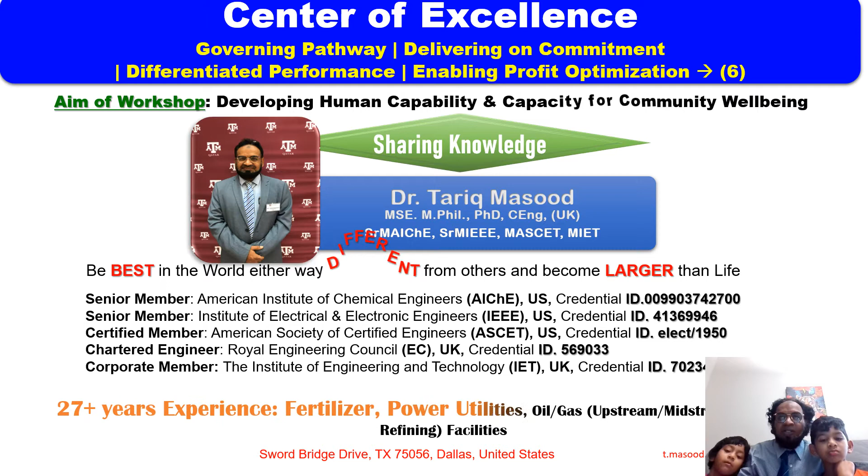Today I'm going to discuss my lecture number 6 on Center of Excellence, governing a pathway, delivering on commitment, differentiated performance, enabling profit optimization process, lecture number 6. Earlier we concluded the 4th section of HAZOP study. Today we are going to discuss HAZOP study session number 5.

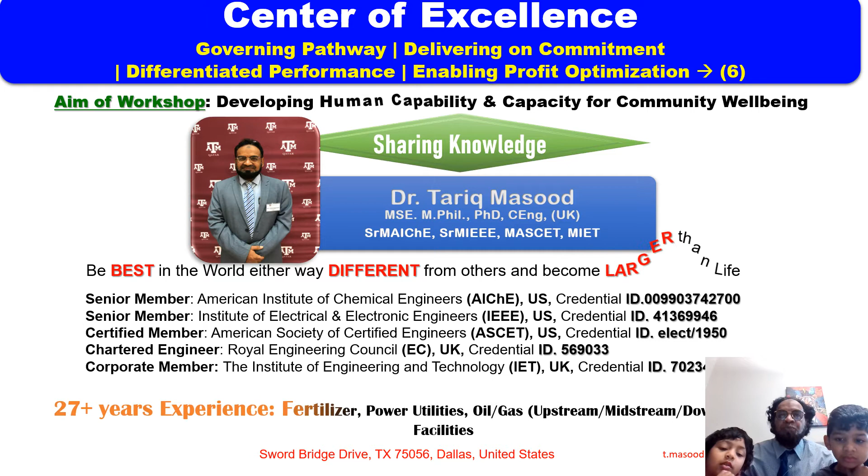Before my lecture I used to read a Quranic verse. Qala Rabbi Shrahli Sadri wa Yassarli Amri Wahlul Uqdatum min Lisani Yafqahu Qawli, Allahumma Rabbi Zidni Ilma. O my Lord, open my chest and ease my tasks for me, and loose a knot from my tongue that they may understand my saying. Allahumma Rabbi Zidni Ilma, O Allah, advance me in my knowledge and true understanding.

Center of Excellence, lecture number 6, HAZOP study guideline, section number 5.

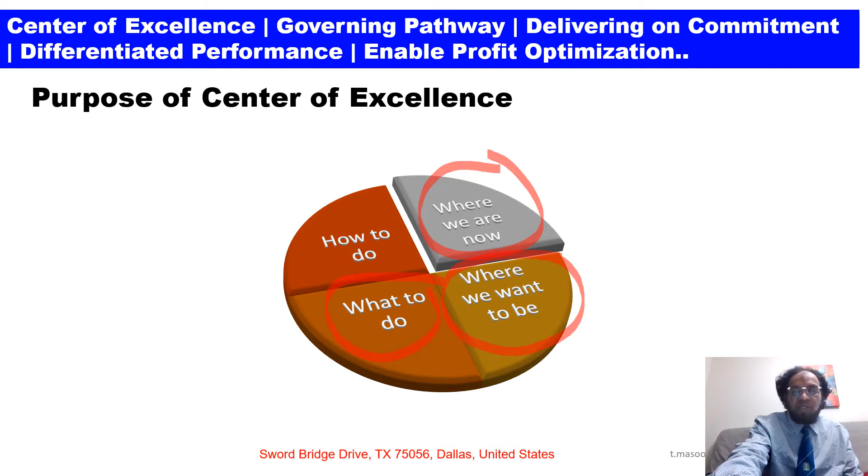Purpose of Center of Excellence: where we are now, where we want to be, what to do, and how to do. These are our 4 concepts in order to deliver the Center of Excellence. These are a narrative, sequential narrative to deliver as far as the Center of Excellence is concerned.

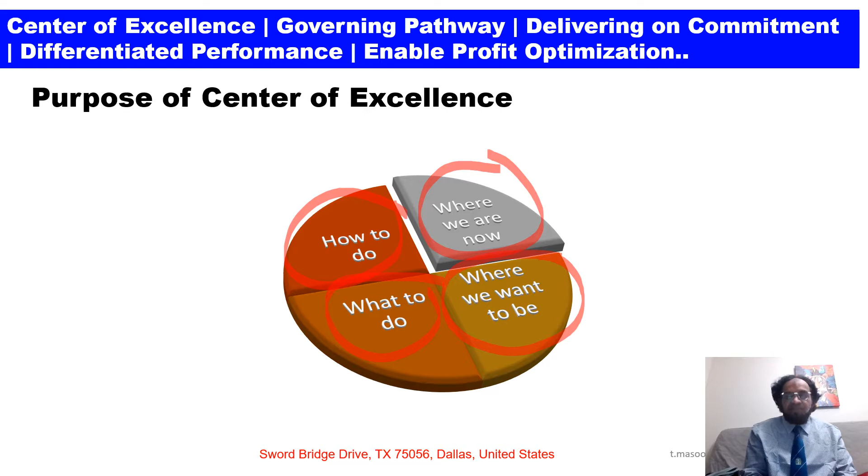Center of Excellence, governing pathway, delivering on commitment, differentiated performance, enabling profit optimization. This is a Center of Excellence framework. We have already discussed the HAZOP, brief summary about QRA, quantitative risk assessments, risk assessment management system, and SIL assessment.

Today we will give a brief about 5 segments, then we will discuss in detail at a later stage. First we will give a brief about the leadership best practices. Engineering and production best practices are leadership methods and simple in concept.

We will discuss in my lectures on leadership best practices, matrix organizations, about balanced leadership, layered leadership that differentiates focus but keeps line of sight. Production asset business widens view to see the whole picture, business planning tool and budget process. We will discuss this in leadership best practices or engineering and production leadership.

Lecture number 2 on Center of Excellence, at a later stage, segment number 2: competency assurance. In competency assurance, we will discuss what is competency, key elements of staff competency enhancement, how to maintain personal and operational integrity, and we will also discuss ensuring a personal competency development and sustainment plan.

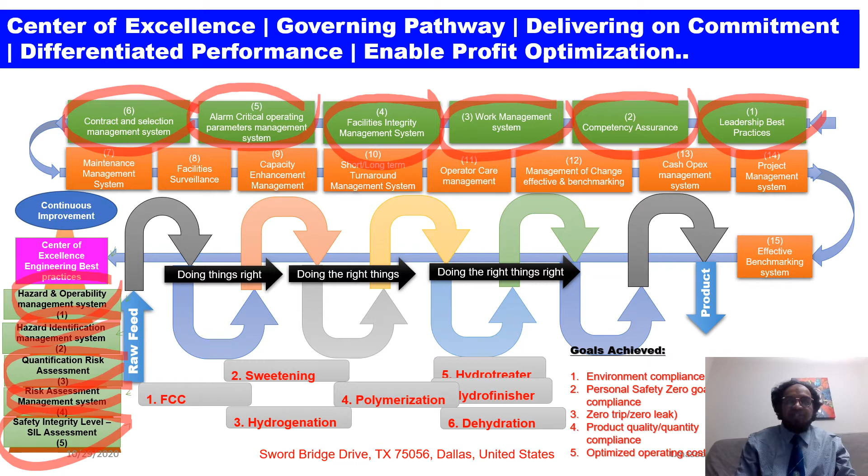Okay, Center of Excellence for continuous improvement. We will start from bottom to top here.

First segment here: personal safety, contractor, co-workers, and community safety must be reliable. These are my leading factors. My semi-leading factors are environment compliance, process and asset safety - work safely or not at all. Number 3, my semi-lagging factors: there's always a time to do right things in the right way. And lastly, improvement - if it is worth doing, do it in a better way.

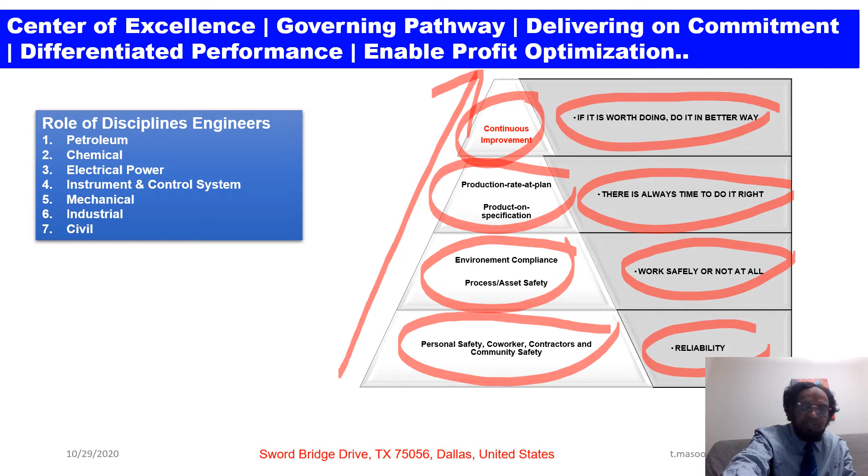So in order to deliver, we need different discipline engineers - petroleum, chemical, electrical, instrument, mechanical, industrial, civil engineer. What specialty do they have? Loss prevention engineers, safety engineer, process, operation engineers, optimization, all discipline maintenance engineers, corrosion engineers, integrity engineers, reliability, cost, budgeting, and project engineers. They have to deliver in order to prevent the leakage from leading factors.

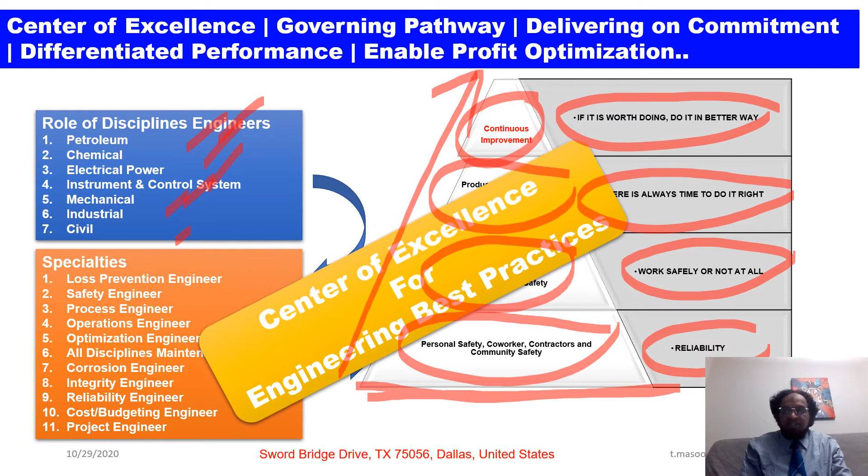So if we plug the leading factors, you are on the right way to deliver or improve this system or system performance as planned or as desired. In order to deliver the result, a Center of Excellence for the engineering best practices is important, vital, and viable.

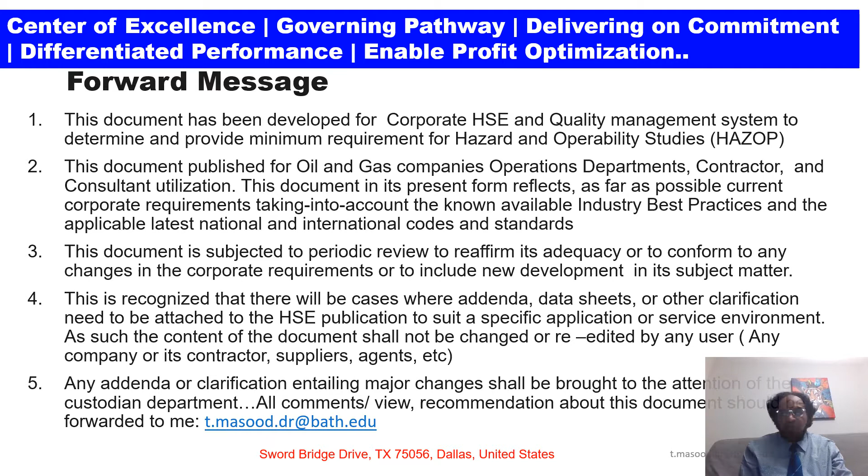Why HAZOP study is needed? First, HAZOP is required for any changes to the process. Hazard and operability studies are a form of hazard identification. The study identifies possible deviations.

Contractor shall conduct HAZOP study in compliance with requirements in the selected company operational guidelines. Contractor shall constitute a team comprising all discipline engineers. Contractor shall design a review meeting. Contractor shall submit the HAZOP package. Contractor shall prepare the HAZOP report. Contractor shall close HAZOP study action points - if instrumented system designed in HAZOP, it can also be discussed.

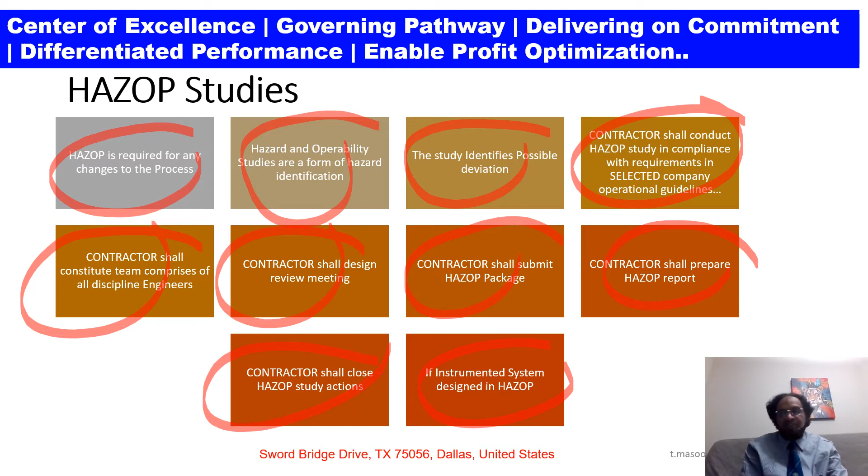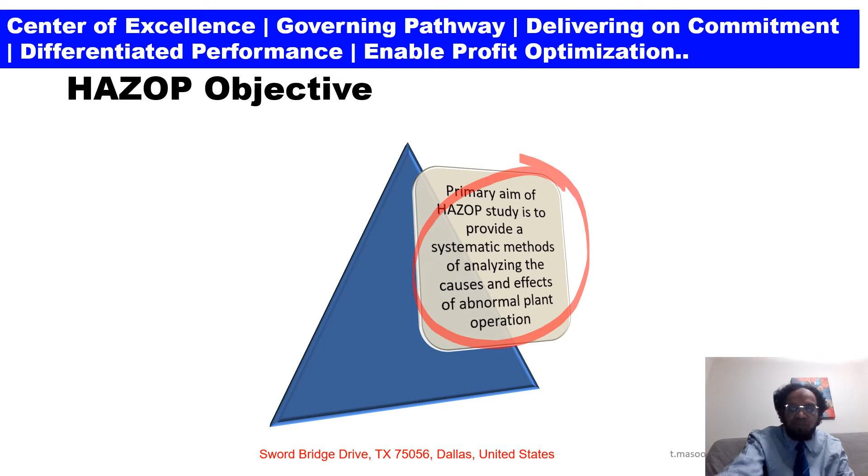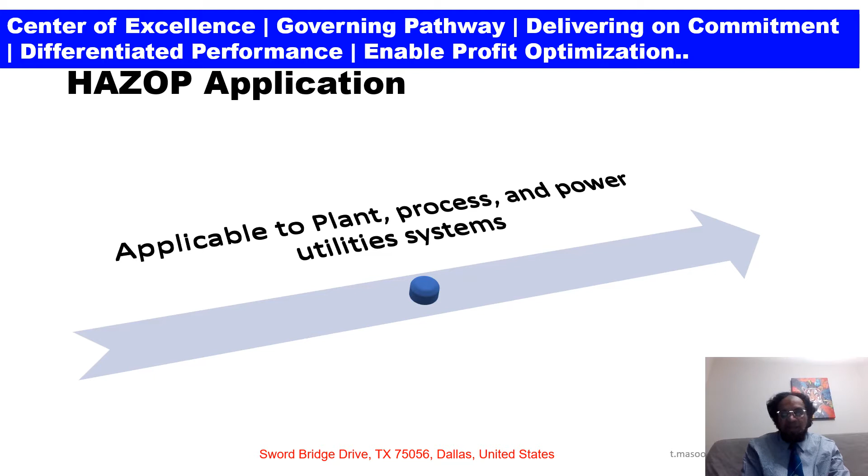HAZOP objective: the primary aim of HAZOP study is to provide a systematic method of analyzing the cause and effects of abnormal plant operation. Scope: to specify the structure, responsibility, and techniques of the hazard and operability study. HAZOP study is applicable to plant, process, and power utility systems.

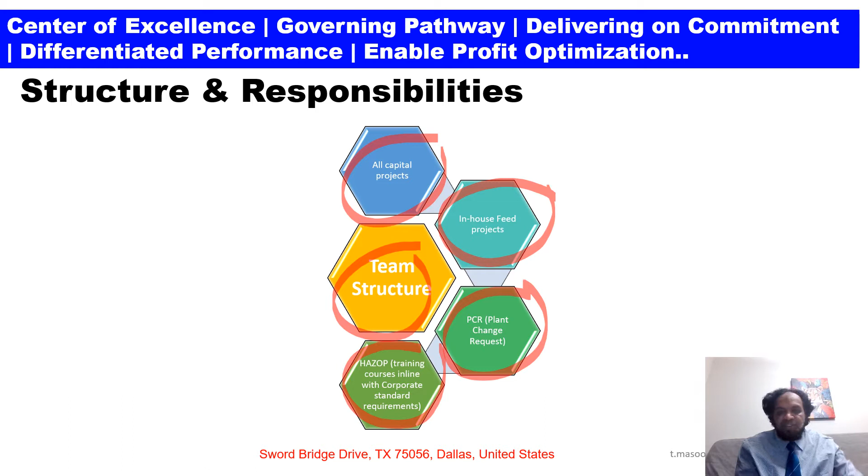Structure and responsibility - team structure first here. So for all capital projects, in-house feed projects, PCR (plant change request), HAZOP is a training course in line with corporate standard requirements. Then HAZOP core team shall consist of a project engineer, operation representative, process engineer, instrument and technical safety, and loss prevention engineer - that's the core team concerned for the HAZOP study.

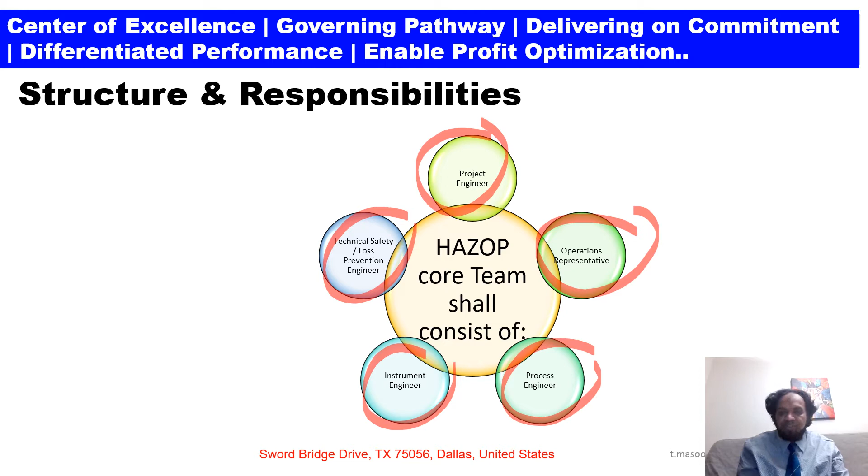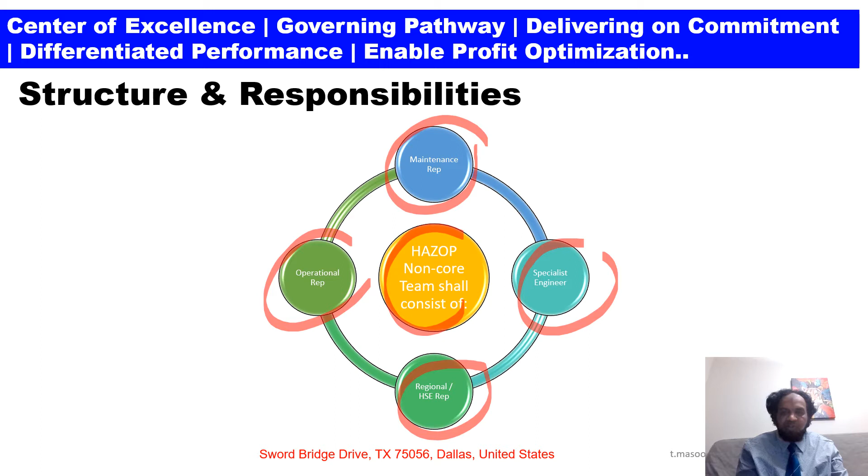HAZOP non-core team shall consist of the maintenance rep, specialist engineers, regional HSE or operational representatives. The specialist can be a process specialist, optimization specialist, or reliability specialist engineer. Experienced staff is important - several members of the team can contribute broad experience from other similar developments in terms of technology applied and locations. Inevitably, the levels of experience and knowledge required for the HAZOP team should consist of senior personnel from the project, operation, and elsewhere in the organization.

The quality of the HAZOP study highly relies on the contributions of the team members and their global expertise. In order to achieve quality results, members of the team should adhere to the following.

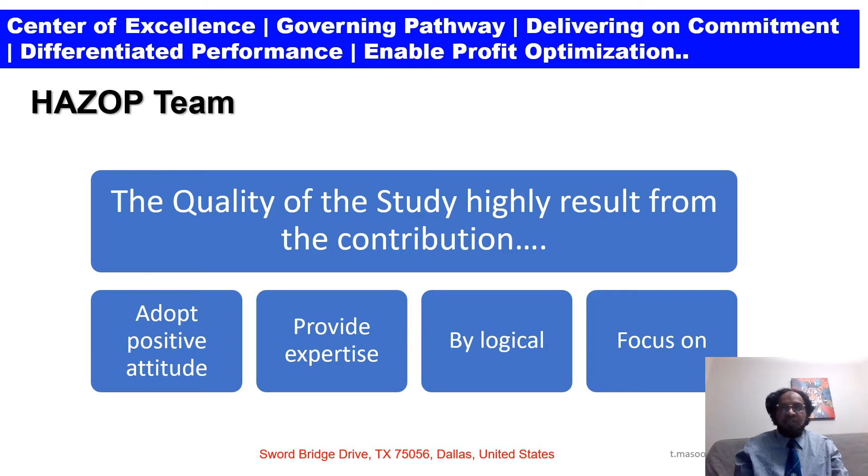One, adopt a positive attitude toward other team members' contributions. Second, provide their expertise on project specifics and from similar experience elsewhere. Be logical, open-minded and creative. Focus on the objective of the HAZOP study.

HAZOP chairperson: what he has to do. All HAZOP chairpersons shall have completed a certified HAZOP chairman's course, preferably IChemE UK or AIChE, American Institute of Chemical Engineers. Number two, the HAZOP chairperson shall have a degree in engineering equivalent to extensive oil and gas industry experience, emphasizing technical safety engineering, etc.

Number three, the HAZOP chairperson shall have conducted at least 10 HAZOP studies after completion of the HAZOP team leadership certification course across a broad range of the oil and gas industry, with no less than 10 years of experience in multidisciplinary projects.

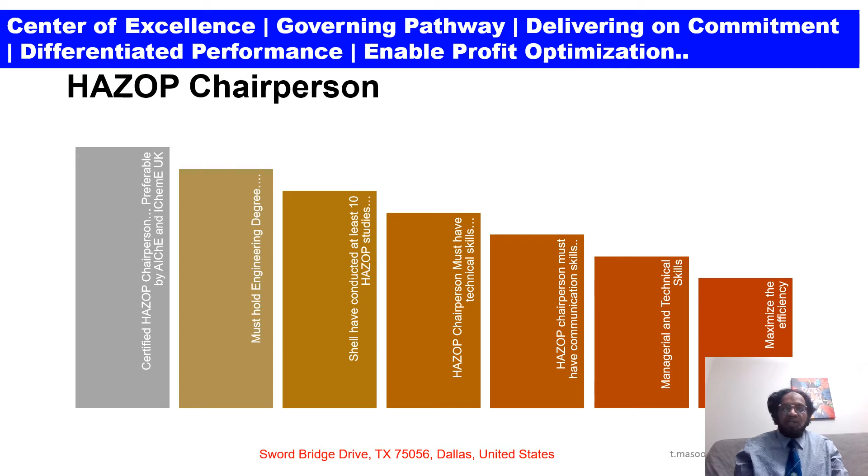Number four, the HAZOP chairperson shall have excellent communication skills in English, report writing and presentation skills, etc. And lastly, the HAZOP chairperson shall possess a high level of technical and managerial skill.

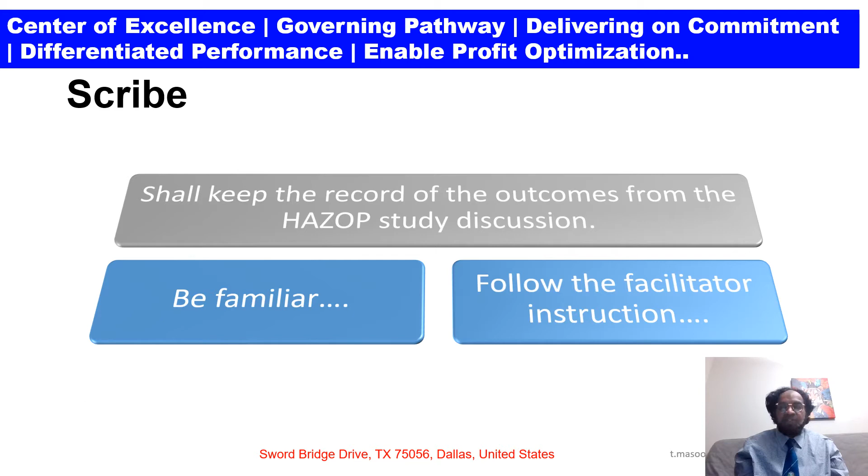The scribe shall keep the record of the outcomes from the HAZOP study discussions, be familiar with the computer software used to record study findings before the start of the study, and follow the facilitator's instructions in recording and keeping team findings and recommendations.

HAZOP study shall be conducted during FEED, that is front-end engineering design. If there are any design changes during EPC stage, then HAZOP shall be conducted. Issue for HAZOP P&IDs and key documents. After these project design documents have undergone design review, the detailed design stage HAZOP and its recommendations shall be incorporated before freezing the design phase, and the Approved For Design, AFD, document is issued.

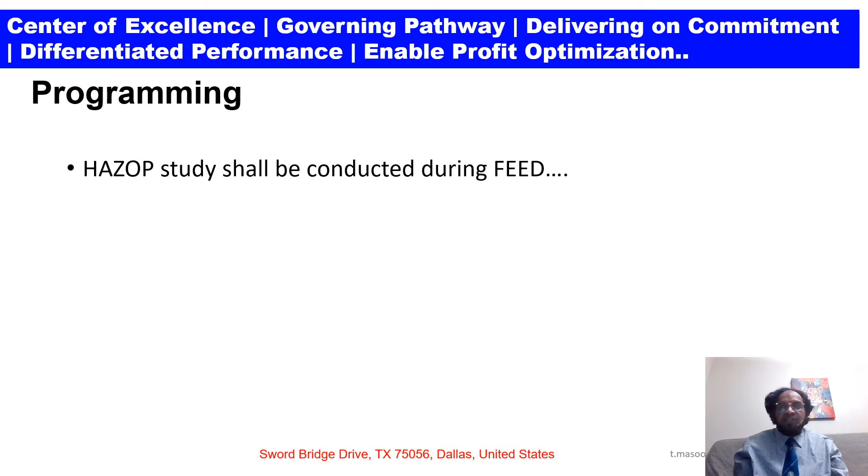Now, from the next stage, we are going to discuss the HAZOP process. The HAZOP process: first briefing, then data collation, data presentation, phasing the activities, and scheduling and meetings.

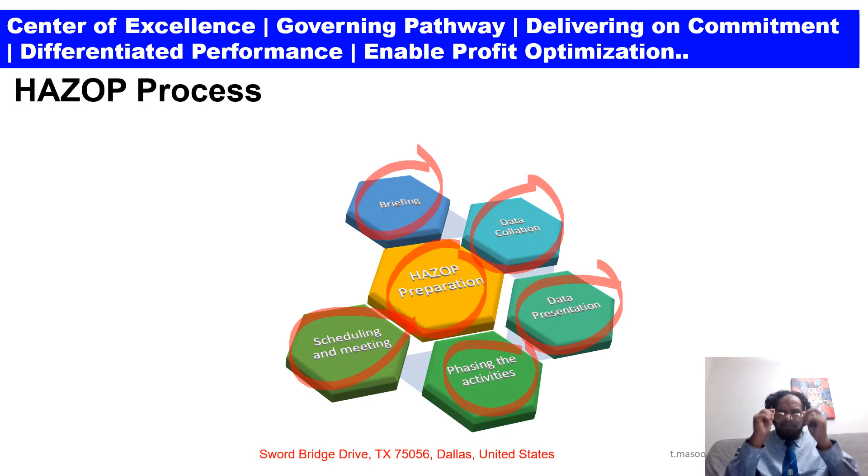Significant preparatory work is required of both the HAZOP team and the discipline engineer concerned prior to each session. This work typically comprises briefing of team members, collecting the relevant data, converting the data into suitable form, planning the sequence of study, and arranging the necessary meetings.

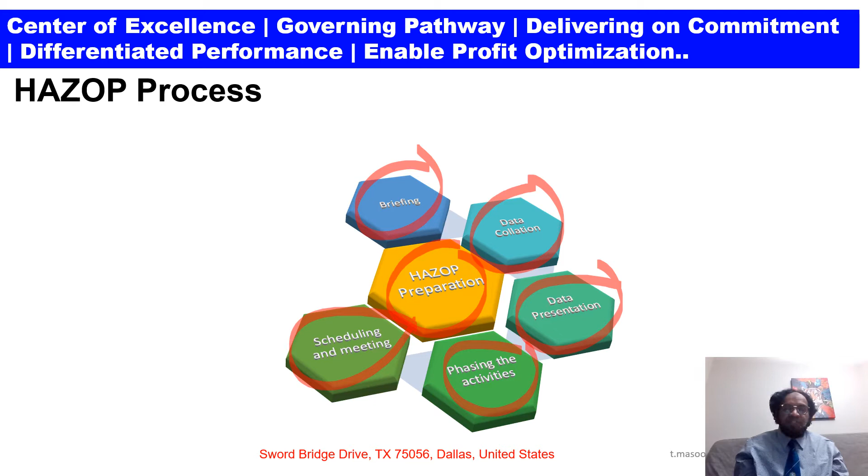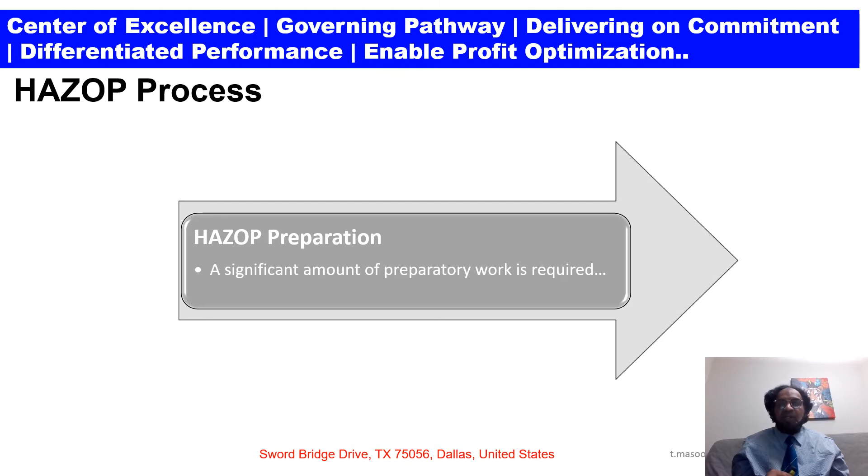So what should HAZOP preparation include? I'm going to repeat what is important as far as HAZOP preparation is concerned. First, briefing of team members. Number two, collecting the relevant data. Number three, converting the data into suitable form. Number four, planning the sequence of the study. And number five, arranging the necessary meetings.

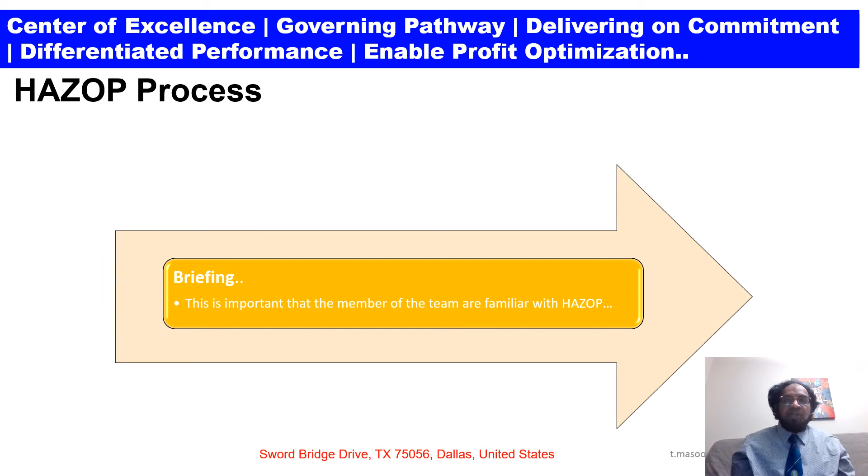Next is the HAZOP process briefing. It is important that members of the team are familiar with the HAZOP technique. If some team members are not trained or familiar, they may be given a briefing with respect to the requirements of HAZOP team members by the HAZOP chairman.

Next, data collation. Project engineers require documents, consulted documents, and the HAZOP package. Number one, the project engineer from engineering or the contractor or the relevant oil and gas company on the project, whether in-house or outsourced, will be responsible for assembling the relevant data to meet the HAZOP study requirements. That is the first step. The individual discipline lead engineer will be responsible for supporting the data to the project engineer where necessary, advising the project engineers on available data and other issues of interest, etc.

Number two, required documents. They should collect and compile first PFDs, P&IDs of the processing utilities, plants, material specification and selection charts, cause and effect diagrams, process design basis, and process operation and control philosophy.

Consulted documents by the HAZOP team depend on single line diagrams, equipment specification and data sheets, vendor data and drawings, fire and gas detection drawings, hazardous area classification drawings, etc. And lastly, the HAZOP package.

The HAZOP package documents, as discussed in my earlier slides, should be issued within 10 working days in advance to allow all participants to review and prepare for the HAZOP report.

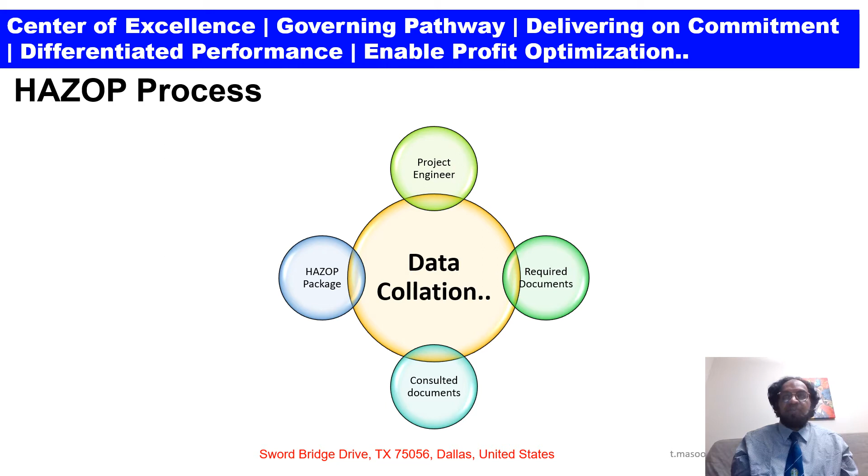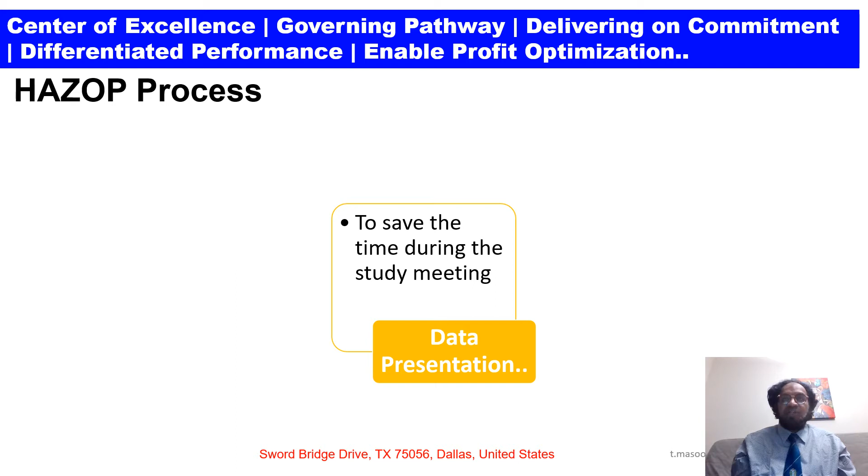Data presentation for the HAZOP process: to save time during study meetings, some documents used during the review may be marked up with additional information, for example P&IDs annotated with normal and design conditions, instrument set points, etc. Any marking shall be done by the relevant discipline engineers, either on his own behalf or at the request of the independent chairperson.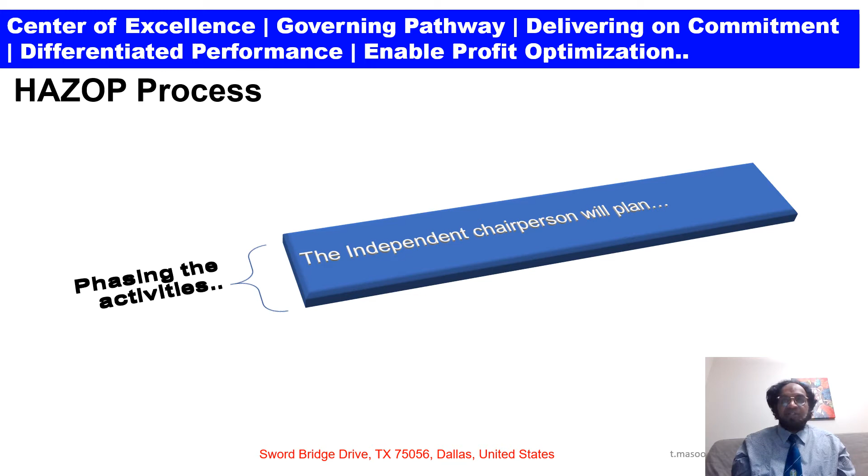Phasing the activities: the independent chairperson will plan the sequence of the study and define the nodes on each P&ID which can be examined in a logical fashion, so that the results of earlier studies contribute to the subsequent studies.

Scheduling and meetings: the project engineer will be responsible for arranging the study sessions and any other relevant meetings, booking of venue, and alerting personnel to their attendance requirements. The project engineer will also arrange for necessary visual aids, black and white boards, flip charts, and computer facilities to be available.

It is a prerequisite that the HAZOP should maintain continuity, therefore sessions should follow on a daily basis. HAZOP sessions are intensive, and more than 6 study hours per day becomes counterproductive, so scheduling of breaks is important. HAZOP hours for a single session shall not exceed 8 hours, and more scheduled breaks shall be planned.

Okay, that was my last slide.

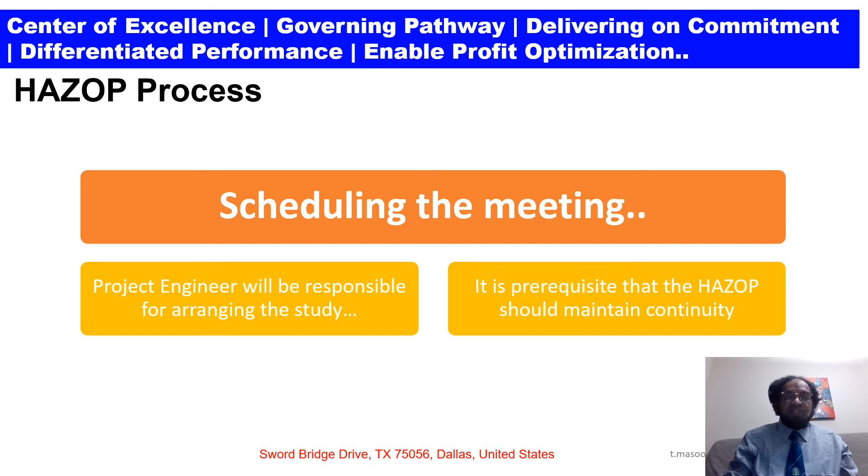HAZOP study session: today we are going to discuss first what the basic requirements are. The basic requirement is that the HAZOP team question or challenge every aspect of design, to determine how deviations from normal operation can lead to hazardous situations or operability problems.

Number two, the HAZOP chairperson shall plan and control the sequencing of the study. The strategy involves a brief description of the system by the process engineer, after which the chairperson selects the first item of equipment or process path node to be examined.

Number three, the function and intent of the equipment or system within the node is explained, and the explicit intention and purpose is agreed by the team.

The chairperson selects a process parameter and guide word in sequence to examine all parts of the system. As we will discuss later, generic parameters and guide words are provided in Appendix 1 and 2, which we will cover in a later lecture, together with the expansion of common parameters and deviations in Appendix 3.

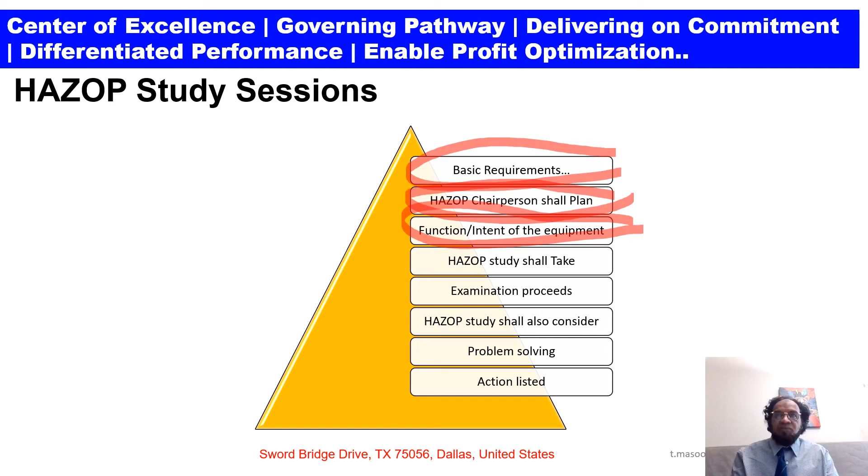The HAZOP study shall be undertaken using software such as PHA Works or PHA Pro. That is number 3 and 4, and examination proceeds.

Examination proceeds only at each plant item, process parameter, and guide word deviation is resolved. A written note is made of the potential hazards or operational concerns, their causes, consequences, and safeguards.

Remedial action recommendations may be made for incorporating further safeguards, and these actions are assigned to a responsible party for resolution. Reporting can be in full or by exception, in which case only those items requiring action are noted. The former is preferred by any company in the oil and gas industry's report format.

This format provides a robust demonstration of hazard identification, even when no apparent issues are identified.

Next, the HAZOP study shall also consider all aspects of the project facility's installation life cycle, from design to installation and commissioning, to full operational state, including regular maintenance, turnarounds, revamps, and emergency conditions and associated abnormal modes of operation.

Problem solving during the session is discouraged. However, a simple problem may well be solved and decisions taken to modify the design. Such action shall be recorded.

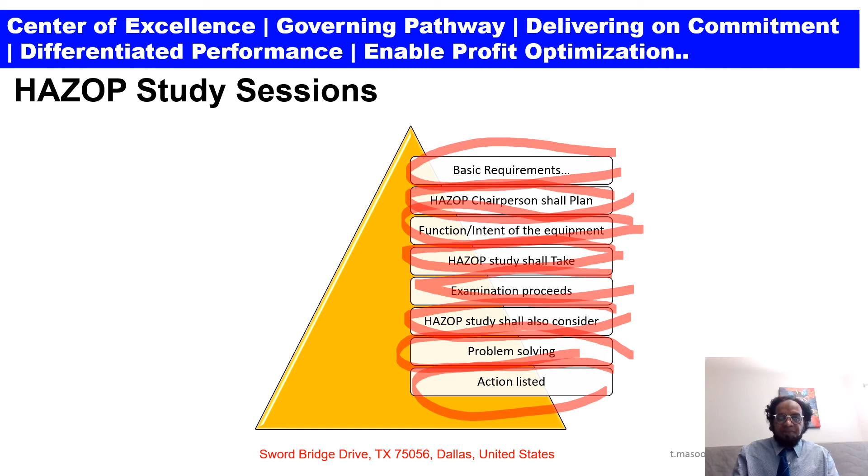From the next slide we are going to discuss risk ranking. First is the hazard scenario: based on the team's experience of the consequences and likelihood, a risk ranking shall be assigned to each hazard scenario.

The objective of risk ranking estimation is to determine the likelihood and consequences of individual hazards and the overall aggregation of HSE risk for the project facility installation. Risk ranking estimation qualitatively determines the risk of individual hazards and related HSE consequences. It provides the basis for assessing risk against risk acceptability criteria and the need for additional risk reduction.

The selection between alternative options on health, safety, or environment grounds and ultimate acceptability of the risk.

Number three, risk estimation. Risk estimation will be undertaken by a qualitative assessment of determining consequences of the hazards, magnitude and severity, in conjunction with the respective frequency likelihood.

Next is the consequences of realization. The consequence of realization of a hazard shall be determined for the potentially worst credible consequences, which shall be identified for people, environment, assets and reputation. That is PEAR: P for people, E for environment, A for assets, and R for reputation.

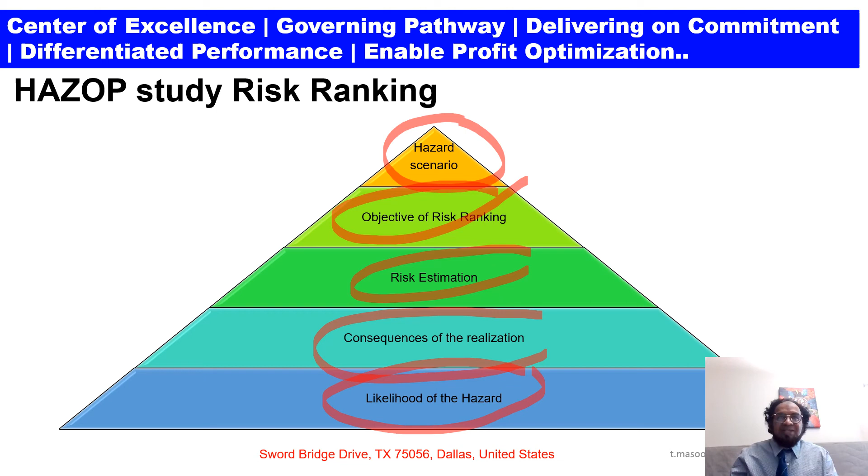So next we will discuss identifying and assessing a major accident hazard, that is called MAH. What basically? Unless all possibles are identified, identification of MAH must assume control measures.

Unless all possible MAH are identified, then causal and contributory hazards may be overlooked and risk will not be accurately assessed. Likewise, controls cannot be identified and assessed. Number two, identification of MAH must assume control measures are absent, unavailable, or not functional. These should follow the principle of what could happen if control measures were not applied and maintained accurately.

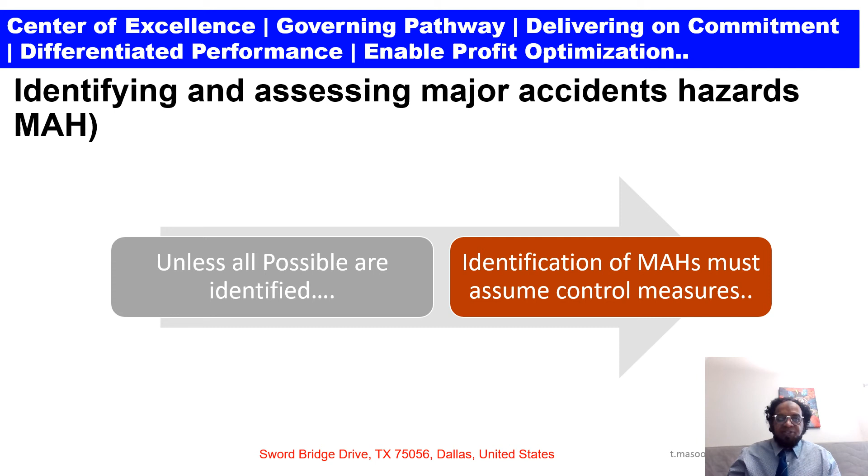Then we're going to discuss, MAH can be identified in three different areas. First, process MAH. Second, MAH arising from concurrent activities, and non-process MAH. First, process MAH: these are MAH, major accident hazards caused by hazards which are associated with upsets in the process or failure of equipment in the process stream.

Second, MAH arising from concurrent activities. Typical concurrent operations which must be considered: number one, major shutdown or startup; number two, other activities on site; number three, activities adjacent to the facility.

Number three, non-process MAH created by non-process hazards that could cause a release of dangerous substances. Non-process hazards may typically include the following: aircraft crashing, dropped objects, extreme environmental conditions, earthquake, high winds, lightning, non-process fires, vehicle and road transport, and power failure leading to a plant upset. That is non-process MAH.

So what they have, a further trail: number one, all MAH shall be defined in terms of initial energy release event, and it can be characterized as loss of containment of a dangerous substance or material. Number two, HAZOP team conducting the identification of MAH shall review the ongoing HAZOP to identify initiating events for each MAH.

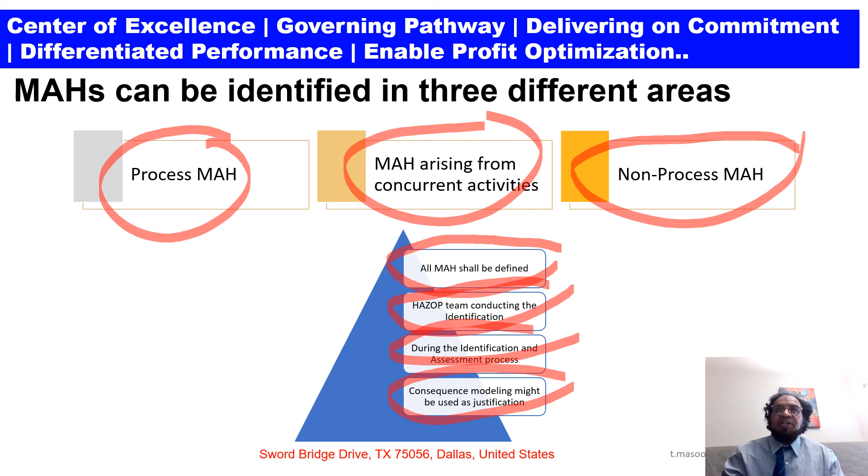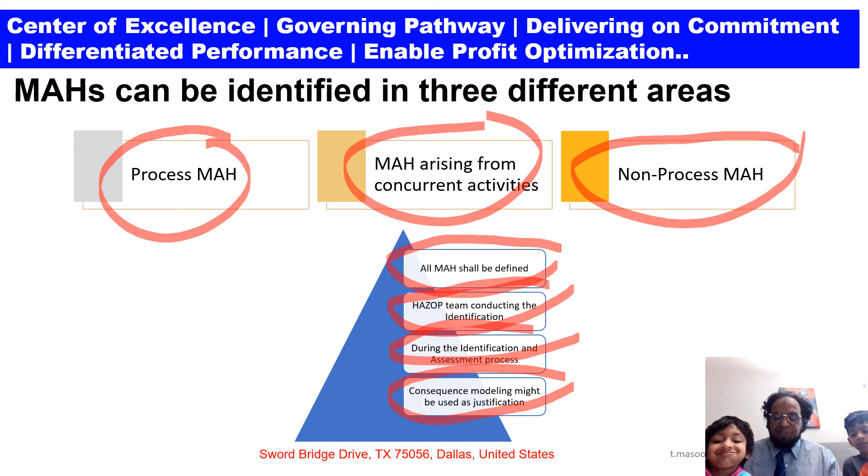Last is the consequences. During the identification and assessment process, screening shall be conducted to identify incidents that pose a serious danger or harm to personnel and environment. As we have discussed, we are going to discuss later on the RAM. This screening shall only be on the basis of consequence, not likelihood. Consequence modeling might be used as justification for screening decisions.

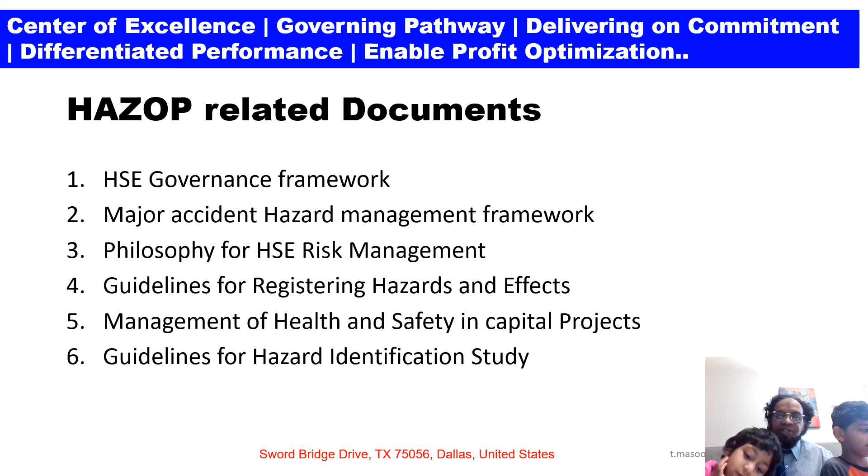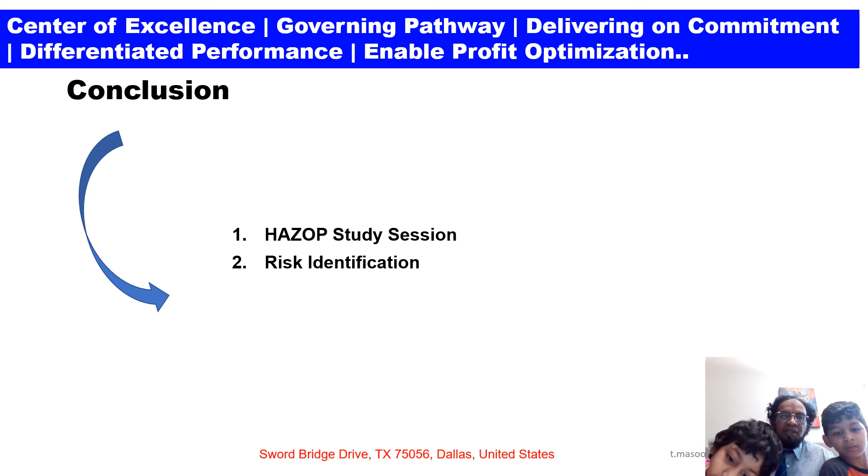What we have discussed today is the study session on risk identification. From the next topic we are going to discuss deliverables.